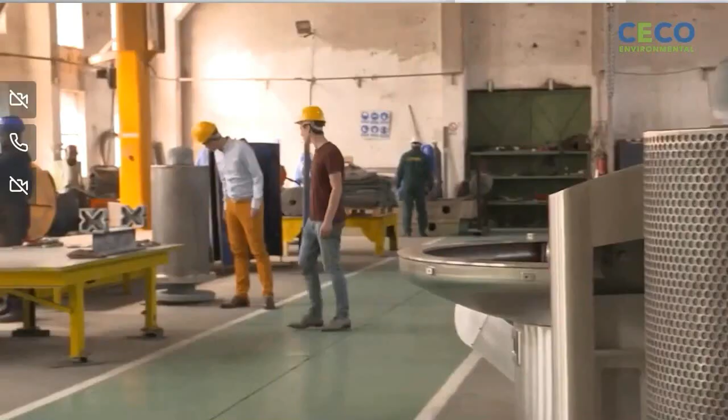CECO-Environmental is energized by our mission to protect people, the environment, and industrial equipment. Our ongoing commitment to this mission is no small feat, and we take that challenge seriously. It's at the core of how we think, feel, and act.

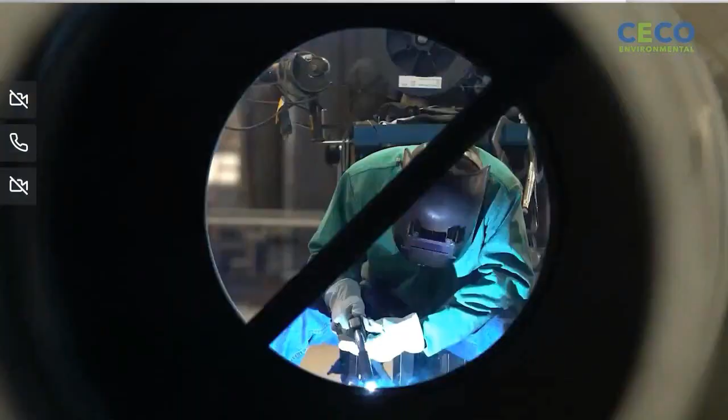For more than 50 years, CECO has served customers in more than 40 countries through our network of trusted and well-known brands. Our expertly engineered technologies help companies across diverse industries grow their business with safe, clean, and efficient solutions that help protect our shared environment.

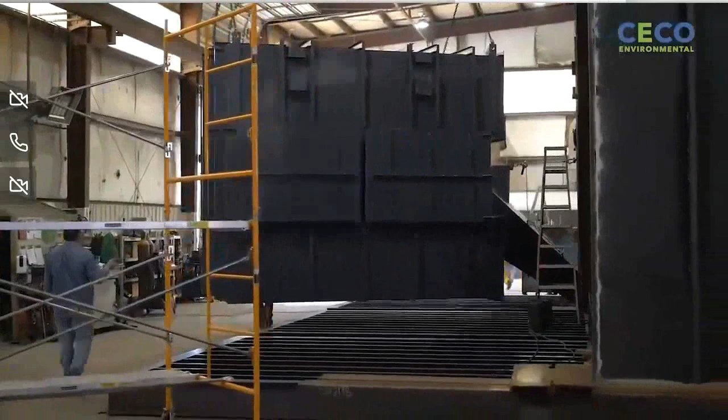CECO can improve air and water quality, optimize the energy value chain, and provide custom-engineered systems for a wide range of applications by leveraging our highly refined technologies and years of expertise. CECO is proud to serve our customers in a broad landscape of industrial air, industrial water, and energy transition markets worldwide across our key business segments.

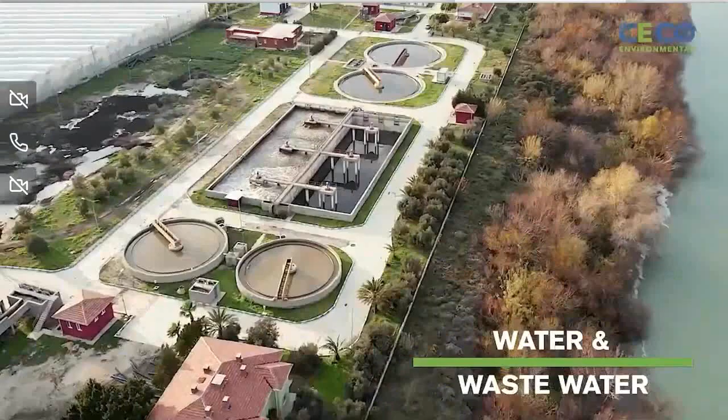Engineered systems, power generation, refinery, water and wastewater, and midstream oil and gas markets require efficient and effective emissions management, product recovery, and water and gas separation solutions. CECO meets these needs with our highly engineered environmental and equipment protection systems.

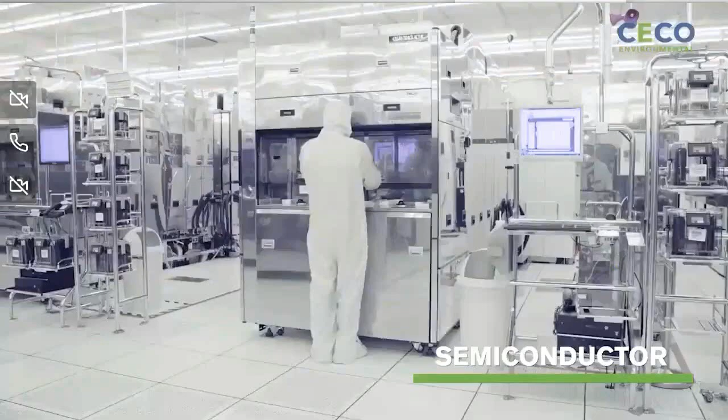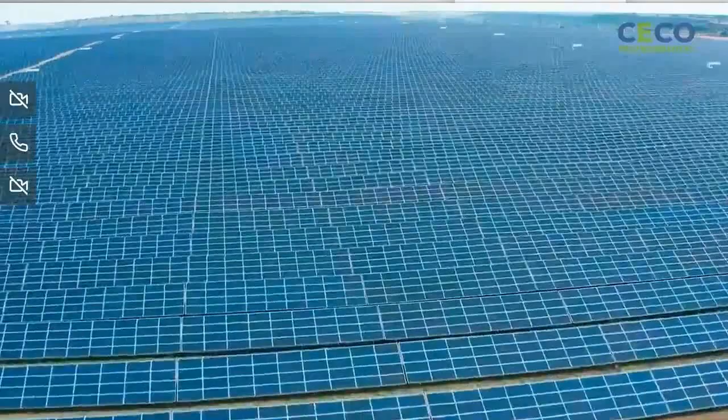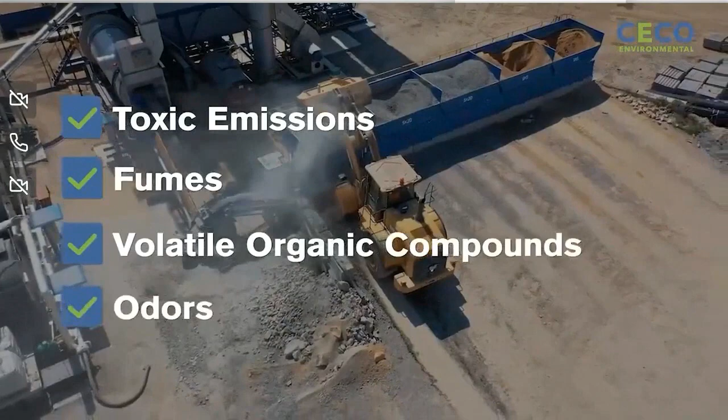Industrial process solutions. From semiconductor to pharmaceutical production, food and beverage to electric vehicle manufacturing, CECO helps protect the air we breathe, maintain clean and safe workplaces, lower energy consumption, and minimize waste for customers to ensure they meet regulatory compliance standards for toxic emissions, fumes, volatile organic compounds, and odors. CECO provides industry-leading products and services to ensure our customers meet or exceed environmental regulations or other goals.

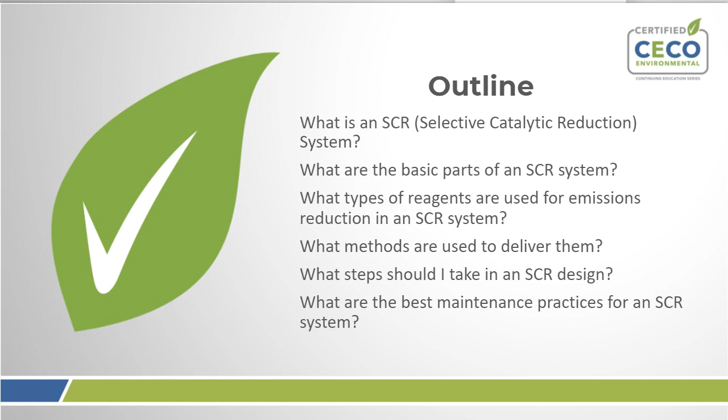We're going to start with a poll question, and we have a few of them in this presentation, and you'll be able to actually input your answers on the next slide. So starting off, how much experience do you have with SCR emission systems? Options are: I'm an expert, I have some experience, I have a little experience, I really don't know what an SCR system is. So here you go. Please enter your answers here, and we will take a look at the results in a second.

Give it another second here. Okay, let's see what we've got.

Okay, so we have here a good portion have a little bit of experience. Some are a little bit more, but it doesn't look like we have a lot of experts, so I think that's great. I think the presentation that we have pulled together for you today that Jeff is going to work on is going to give you a lot of info and give you that great baseline.

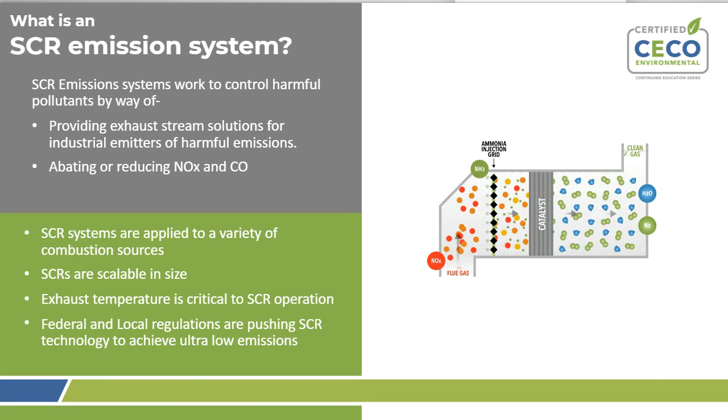So why do we need SCR technology? As mentioned, it's to help reduce air pollution. I think most of us have probably heard of the terms ozone and smog. Some people think of the ozone layer, something we want to protect. A lot of consumer products have CFCs in them, and those have been reduced over the years to help protect the ozone layer because we need that ozone layer up high. Ozone lower, closer to the ground, can be problematic.

Different types of emitters, such as power plants or cars and trucks or factories, emit NOx pollution, and NOx combined with VOCs and heat and sunlight creates ozone down low. And what we see as ozone forms down lower towards us is the production of smog, something you can see by looking outside. If we're reducing NOx well, you'll see less smog in the nearby areas. That's really the main driver for why we want to apply SCR technologies on combustion sources.

So what is NOx? What is the thing that we're saying is helping to create smog, which we don't want? They're nitrogen oxide gases. It's a pollutant that is primarily formed through the combustion process, meaning at high temperature. In some cases, there's actual nitrogen in the fuel. For instance, coal and biomass and some oils will actually have nitrogen in the fuel that will oxidize into NOx. But primarily, in a combustion source, the majority of NOx is created from what is called thermal NOx.

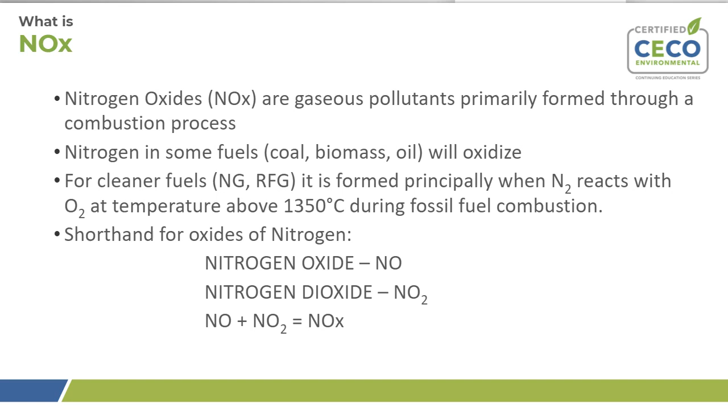As said, it's a driver to reduce air pollution, and in the 70s and 90s, the Clean Air Act by the EPA set out to help in the reduction of this air pollution. The National Ambient Air Quality Standards, NAAQS, called out six different criteria harmful air pollutants: particulate matter, ozone, which we just discussed, SOx, which has to do with sulfur, and then NOx, CO, and lead.

Both state and federal regulations help drive the standards that we're trying to meet today. In some cases, the state regulations can be more strict than the overall federal regulations.

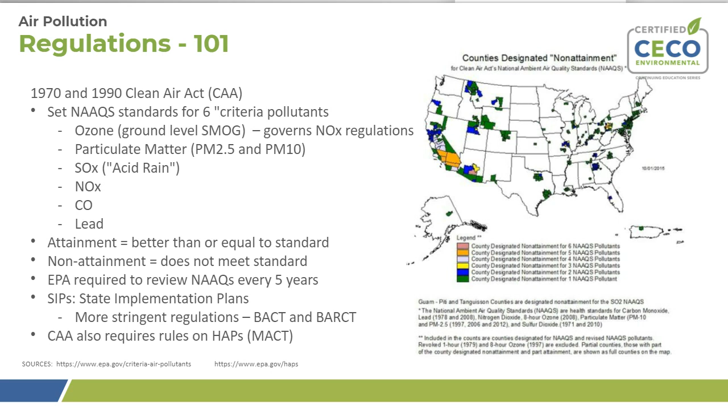To help further define SCR, it's Selective Catalytic Reduction. It uses a catalyst to help reduce the emissions. It's an active emissions control system, which means we are actively injecting and controlling the constituents of exhaust to help reduce the NOx emissions. We do that with a liquid reagent, which is typically ammonia, through a specialized catalyst.

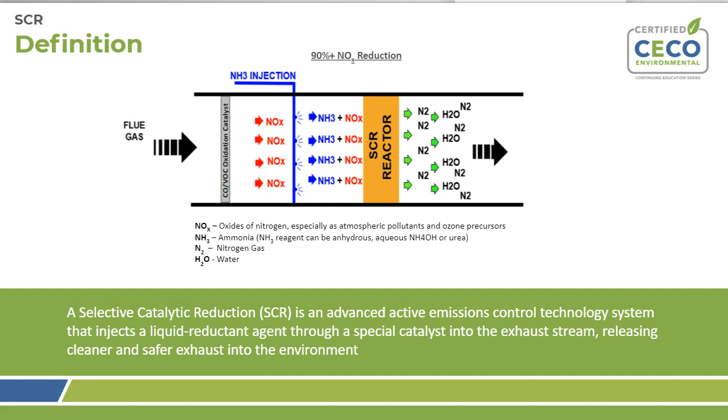What are some applications for SCR? So it's a pretty versatile technology for a lot of different combustion sources, and it can be applied to a wide range of fuels. As we know, different combustion sources can run on different fuels. So a boiler or a gas turbine or whatever it might be might have a different fuel. So natural gas is a very common fuel, RFG or reformulated gasoline, obviously, different fuel oils, coal, biomass, hydrogen, and even some other what are referred to as opportunity fuels or waste fuels could be combusted and create different varying levels of NOx, many of which can be solved by installing an SCR system.

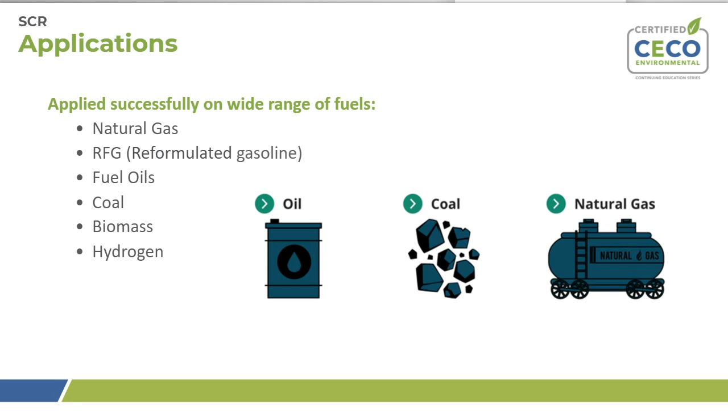So it's a versatile technology in terms of what it can treat from different sources. It's also versatile on the size and type of combustion source. So combustion is a very broad term and it can be done in a variety of ways. For instance, you could have a burner installed on a boiler, a package boiler, a larger boiler, that obviously combusts a fuel and creates exhaust emissions that has NOx.

So a lot of different types of equipment produce NOx because of their combustion process: gas turbines, boilers, engines of a variety of sizes, and others such as heaters and reformers and kilns and incinerators. So it's, again, a variety of fuels and a variety of combustion sources can all be fed to specialized SCR systems to help reduce the air pollution coming from those sources.

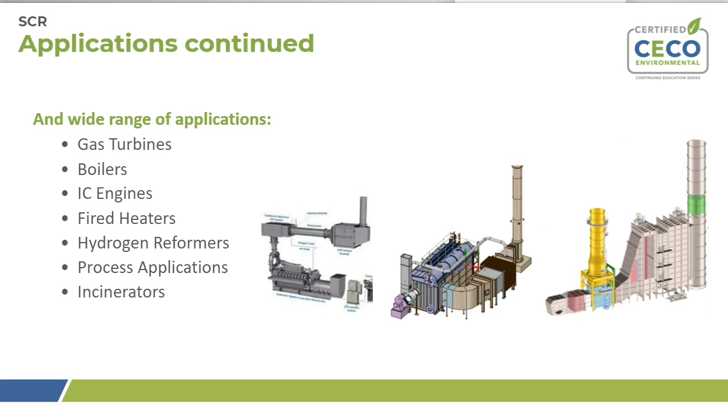So we've been calling it an SCR system, and it truly is a system and isn't a single piece of equipment that is controlling the emissions from the combustion source. It's a combination of equipment or subsystems working together in conjunction to achieve the overall goal. Generally speaking, there's some sort of storage for the liquid reagent we mentioned, typically ammonia, that needs to be stored on site to be used in the process. That then needs to be forwarded to the process and controlled in a specific way to make sure you're not using too much or too little of that reagent.

And then it needs to be carefully injected, depending on the size of the exhaust and the quantity of exhaust and ammonia being used. There's different methods for how you would inject it and introduce it into the exhaust stream. And again, it needs to combine with that dirty exhaust upstream of the catalyst, mix out in the catalyst, and reduce the emissions in that method. So there's several subsystems that go into making a complete SCR system function properly and efficiently.

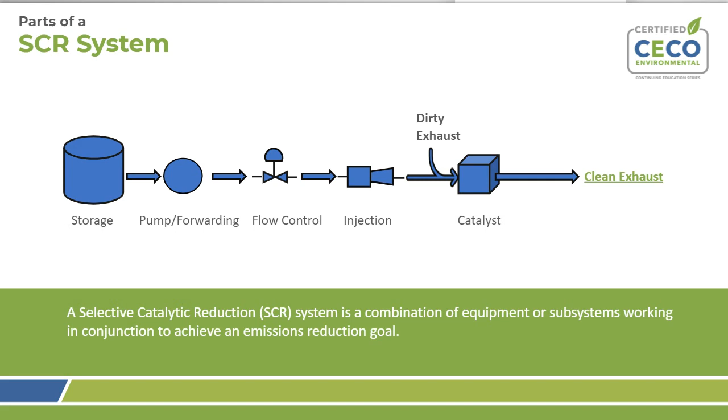So as mentioned, there's storage. So typically there's an ammonia storage tank involved with the system, and that's kind of the first step in the process. We need to make sure we have the reagent on site, on hand, to be able to effectively reduce the emissions. So typically, these tanks are designed and fabricated to certain codes of the American Society of Mechanical Engineers. There are standards that need to be met, and a lot of those standards are designed around the safety of storing this liquid.

Typically, the size of a tank, and of course it depends on the size of the system and how much NOx needs to be reduced, but 500 to 10,000 gallons of capacity is within the typical range, and you can certainly use smaller tanks or much larger tanks if needed, depending on how much storage capacity is required. Typically, they're large steel tanks. They could be steel, they could be stainless steel. In very specific applications, you could use alternate plastics or whatever it might be.

Ammonia is typically stored under pressure, so the tank needs to have specific pressure ratings, and you need to monitor the condition of that tank. So there's instrumentation involved with the storage. We want to monitor, obviously, the level of the tank to make sure there's enough liquid in there for the process. The temperature, the pressure are important. The ammonia can operate throughout a wide range of temperature, but you need to monitor it to make sure it's not outside of that range.

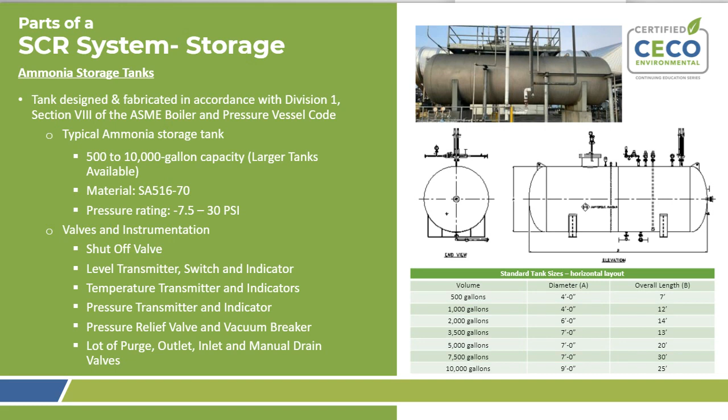So from that storage tank, we go to typically a pump skid, and that pump skid is used to send this liquid reagent out to the process. It also circulates that reagent to the tank to maintain certain pressures and turn over the tank if needed.

Typically, we like to avoid single points of failure. So oftentimes on a system, there will be redundancy, and that 2x100 represents each pump able to handle the entire flow of the system if needed. If there was a problem with one of those pumps, the other one could be used in its place. Oftentimes, these are made of stainless steel because of the location of the installation, the harsh environment it might be located in, and the longevity of the equipment.

And again, a lot of instrumentation involved with the pump skid, as with all the other parts of the system. We want to monitor certain parameters to make sure the system is operating as we want it. So the pressure, we don't want to overpressurize anything. So there's safety switches, safety valves. We want to monitor the flow and the pressure of the liquid out to the process.

We want to make sure that liquid is clean to the process. We don't want to have any tramp material coming from the tank, or that might be some impurities in the reagent. So we filter the ammonia as well in this stage to make sure we're not plugging anything up downstream. And we'll typically monitor the pressure across that filter to make sure we know when that needs to be cleaned.

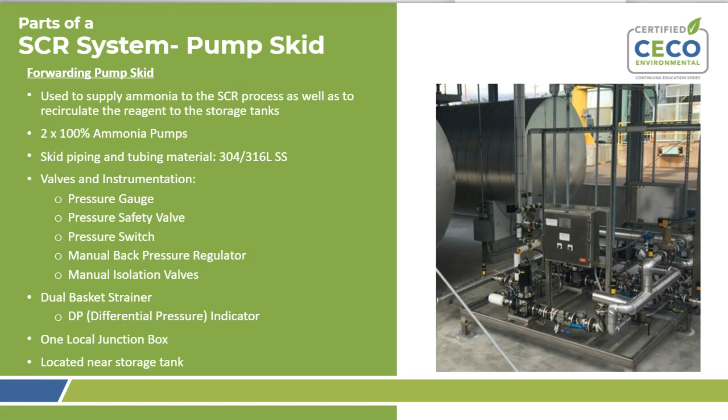There's obviously going to be some junction boxes and controls involved with the system. So as you can see from the picture, a junction box, and oftentimes this is located next to the storage tank. There are certainly specialty situations where this might be remote, but ideally this tank and pump system are relatively close to each other.

So we also need to control the amount or the flow of ammonia being introduced to the process. Obviously, the size of the system, how much emissions are being reduced, how much exhaust flow there is, it's going to change the amount of ammonia required going through the system. Every SCR system has its own set flow requirement. So we need to carefully control that flow and how we introduce it into the process.

Oftentimes that's done with flow control valves for the reagent, and we feed that into what is often referred to as an AFCU, or ammonia flow control unit. And that ammonia flow control unit is used to take that liquid reagent and vaporize it into an ammonia gas with the use of hot air or hot gases.

A very typical way of doing that is to use some fans. Again, just like the pumps, we would often use redundant fans. An electric heater can be used to create the heat needed to vaporize that liquid into an ammonia gas, and we can then control the flow of that ammonia gas to the process through the AFCU skid.

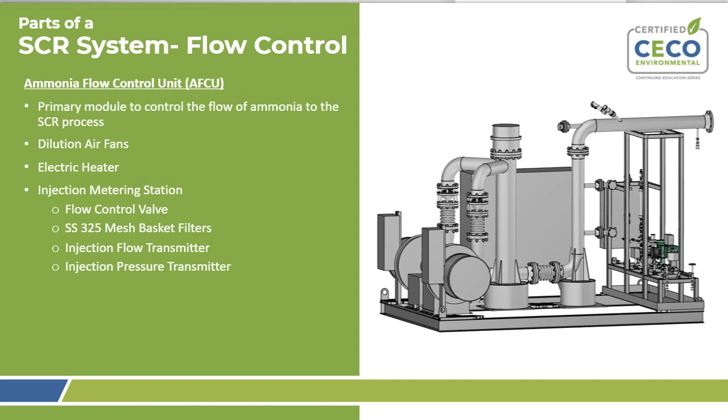So as we mentioned, an SCR system can be applied to a lot of different types of units with different types of fuels and different types of exhaust gases. Because of that, there's not a one-size-fits-all design solution for an ammonia flow control unit. So there's different designs that could be used in the process to control the flow of ammonia into the system.

So some of these systems use what's called hot gas recirculation, where you're actually pulling exhaust gas out of the combustion source and using that as the heat to vaporize your ammonia. Oftentimes on a smaller unit maybe, we use an electric system, which again, ambient fans, taking in fresh air, pushing it through a heater and using that as the heat source to vaporize.

Or you could actually combine those two types of systems. So you could actually pull in hot gas and heat that hot gas with an electric heater if you wanted to start up sooner. So some regulations are pushing different combustion sources to reduce NOx as quickly as possible. So a combined unit might be used on a larger unit or a unit that needs to start up more quickly and not wait for the process to become hot, but promote that heat more quickly so the SCR system can start up more quickly.

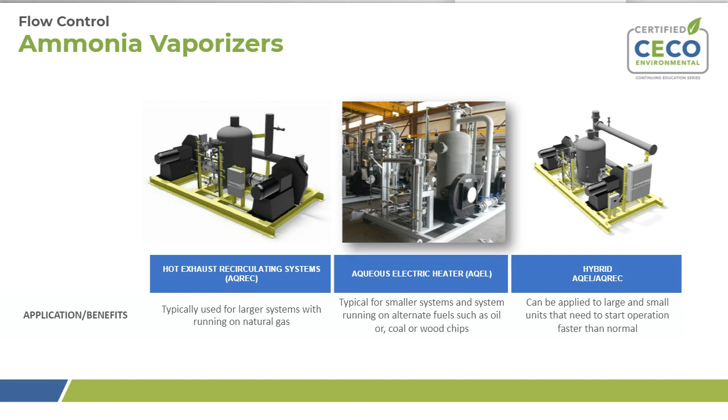So another part of the SCR system is the injection. So how is that ammonia then injected into the exhaust stream? So at this point, we've been on kind of the cold side. Most of the equipment is outside next to the combustion source, but we need to introduce that ammonia into the exhaust flow before it goes to the catalyst. So we need to mix that ammonia out with the exhaust. So we need to, what we call, inject that ammonia.

So there's multiple ways to do this. Two very common ways here are with an ammonia injection grid or with actually a liquid nozzle. And they are obviously designed to introduce the ammonia into the exhaust gas. And AIGs are used to do that in the vapor form, whereas an air-assisted injection nozzle would be used to inject it as a liquid upstream the catalyst and use the heat of the exhaust. We'll go into more detail on both of those in subsequent slides.

The size, the quantity, and the injection rate are all factors on how you design and size the type of injection equipment used in the specific application. The duct size makes a big difference. How hot is the temperature of the exhaust, and what are the requirements of the system? How much of the NOx in the combustion process does it need to reduce?

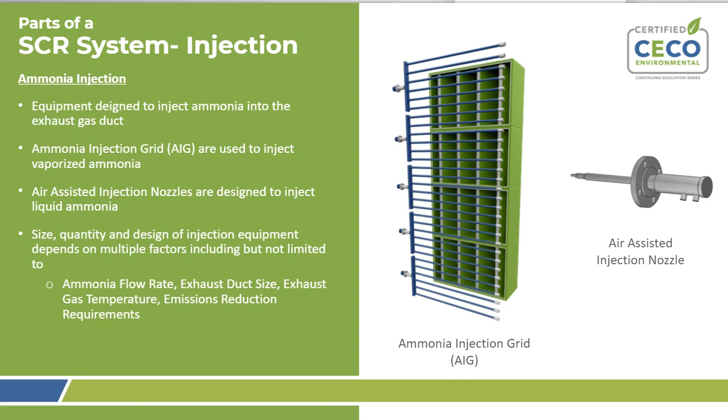So as mentioned, there's really two main types of injection systems. Again, the AIG, the ammonia injection grid, is used when you're vaporizing liquid ammonia into ammonia gas and then introducing it into the exhaust. And the air-assisted nozzle is when you're injecting the ammonia in as a liquid directly into the combustion source or the exhaust gas and having it vaporize with that heat.

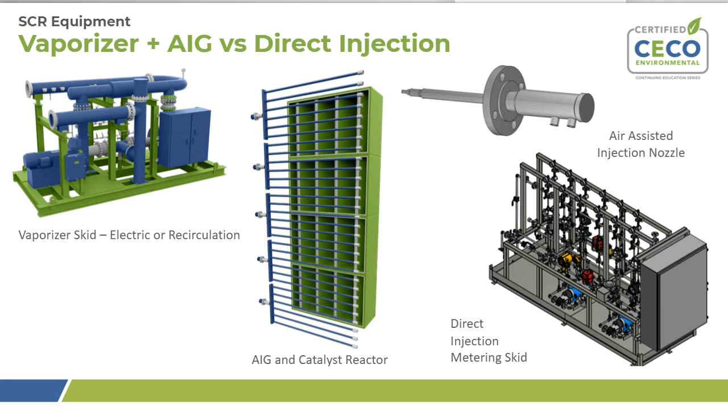Obviously, a critical part of the system as a whole is the catalyst itself. All of the exhaust gas needs to pass through this with the NOx and ammonia for the system to be effective and actually reduce the air pollution. So some of you might be familiar with the catalytic converter that's on your car or your truck. If you've ever seen that, it's a porous substrate that all the exhaust gas passes through, and it reduces, in that case, CO emissions. This catalyst at a high level is relatively similar to that. So all of the exhaust gas must go through the catalyst to reduce the emissions.

So it's typically precious metals that are impregnated onto a porous substrate. So if you were to be looking through a catalyst, you could actually see through it a little bit, but there would be very small holes that you would see. These precious metals are formulated and adhered to the catalyst based on the specifics of the system. So the exhaust flow, the exhaust temperature, the emissions requirements, and how much NOx needs to be reduced are all factors that the catalyst suppliers use to formulate and engineer their catalyst to perform on that specific application.

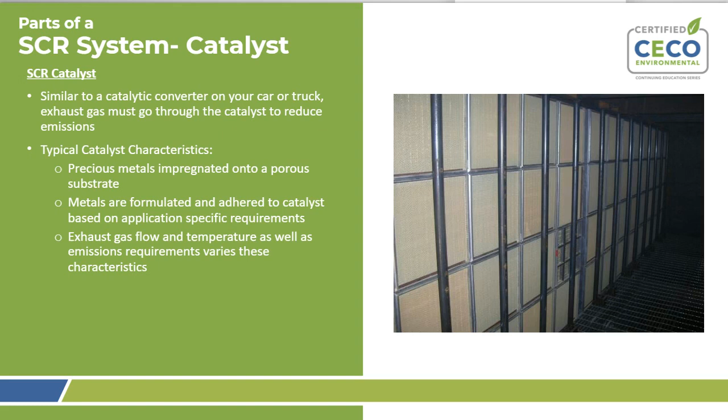So as you can see there, a picture of the catalyst of a relatively large system. It's typically installed in the field when the system is being built. The amount of catalyst depends on just how much exhaust is going through it. So the more exhaust going through the catalyst, the more catalyst volume we need. And the higher the NOx reduction requirements of the system, the more catalyst volume we need. So there's quite a bit that goes into the sizing of how much catalyst you need to treat all of the exhaust.

Catalysts are typically made in modules at a factory, and they're shipped to the site, and then in something like that picture that you're seeing there are installed by qualified professionals. It oftentimes requires scaffolding and hoists and things of that nature to make sure the catalyst is installed properly. And in the maintenance portion of these slides, we'll see why that is so important.

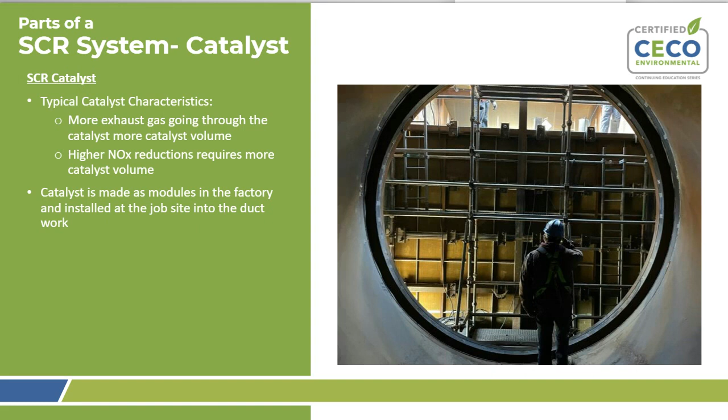There's a lot of unique designs in today's industry that the catalyst suppliers are able to make, things to reduce pressure drop or operate at higher temperatures or lower temperatures than they've been able to in the past, or treat different types of exhaust constituents. So a lot of specialty products out there. And it's very flexible. It's custom designed for the application.

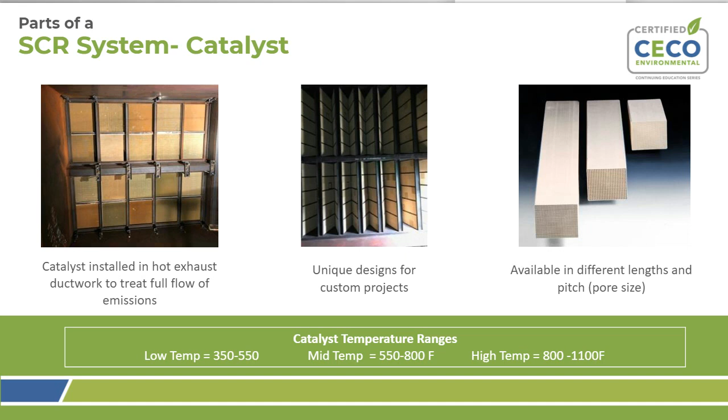And there's also specialty catalysts that can reduce more than just NOx. It could reduce CO or even VOCs in one layer of NOx. And there are other standalone catalysts that can do different exhaust constituents as well that are not necessarily related to SCR, but might be used in conjunction with them.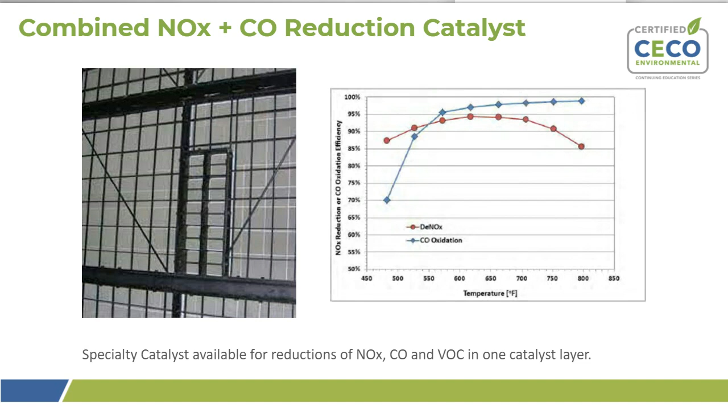So in addition to the prime sets of subsystems that go into the SCR system, the storage and the forwarding and handling and the AFCU skids and the injection, there's going to be other systems or ancillary pieces of equipment that need to go along with this to make sure it's fitting up to the combustion source that it's being applied to. So there's going to be some extra ductwork involved with having an SCR system. You may need fans to control the flow of gas, to overcome pressure, to cool the exhaust to a certain temperature that might be needed.

There's going to be some sort of support structure needed to hold up the system. These can be very large systems in some cases, in which case you also might need to be able to access the equipment. So additional platforms and ladders and other ancillary equipment might be needed.

And then it's possible that the emissions might need to be monitored at all times. So if a state regulation is forcing an SCR system to be used on a certain combustion source, they may also require that the NOx emissions be reported on a continuous basis. And there are analyzers that can be installed to accomplish that, to make sure the SCR system is working properly.

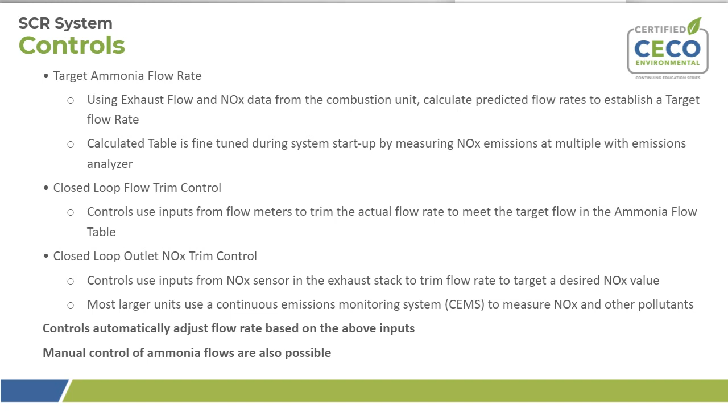Most of the time, these systems can operate in automatic, so they're set up with the end user at the particular plant or site they're at, and they can run in automatic when the combustion unit starts up. So does the SCR, or sometimes they're more of a manual process. But there's a lot of controls that go into making sure these systems work properly. These are just examples of sketches or graphics of what those controls might look like and how they apply to a system that operates at different conditions.

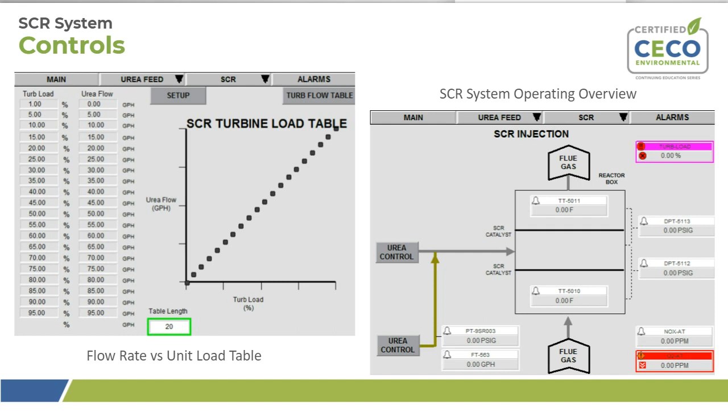So if you think of an engine and you push down on the gas pedal, your engine's then working harder and there's actually more exhaust coming out of it. So same with a much larger combustion source. All these different sources can operate at different, what we call load ranges or operating conditions. So the different operating conditions would require different flow rates of ammonia, and that all needs to be monitored and controlled. Again, because there's multiple subsystems involved with a full SCR system, monitoring the tank level or the pressure of the ammonia or the heat of the exhaust, all of these things are important to make sure the system is operating the way it's designed to and reducing the harmful pollutants.

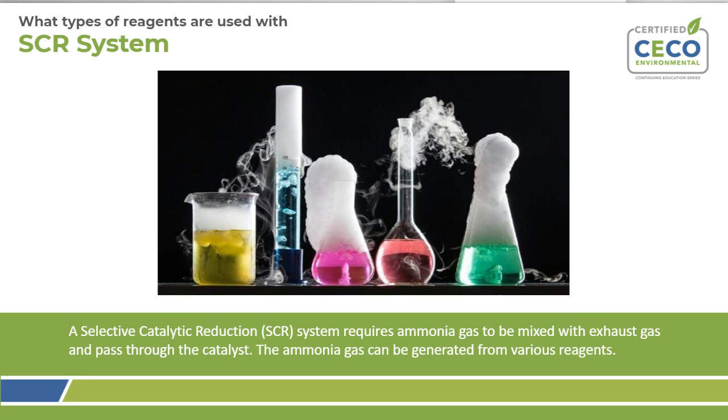So what types of reagents can be used with an SCR system? Ultimately what we need is ammonia gas being mixed out in front of the catalyst. The catalyst is using the ammonia as a gas, but there's multiple ways to achieve introducing the reagent into the system to produce that ammonia gas. Namely, there's three main ways to do that. Anhydrous ammonia, which is already in gaseous form, can be stored at the site and controlled and sent over into the process. This is a method that's been used for many years, but it does have some safety concerns.

So anhydrous ammonia or ammonia gas is very dangerous to the personnel working at the site. So there's a lot of factors that need to be considered in how it's stored, how it's transferred and even how it's delivered to the site. So that can be a little bit arduous for some locations and a little bit too dangerous in certain applications. So there's been, over the years, ways to figure out how to make it a safer process.

One of those processes is to use aqueous ammonia, which is in a liquid state. So it's essentially diluted ammonia, and you can store it under relatively low pressure in a similar type of tank. The most common way the ammonia is diluted is down to 19%. 29% is also used, but the more common way is a 19% ammonia solution. It still has some safety concerns, but it's not quite as dangerous because it is a diluted reagent at that point.

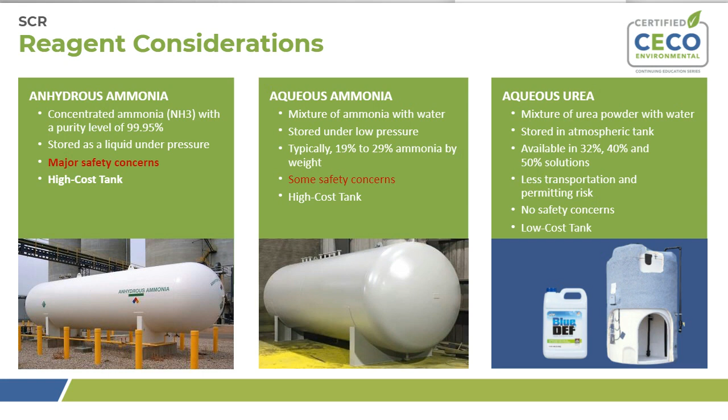The safest version is to use urea. Urea is also known as DEF, or diesel exhaust fluid. That's widely used in automotive applications and has been applied to larger systems as well. And there's different concentrations of urea as well. The main selling point of urea, or the main driver of using urea, is because it can be stored without any safety concerns. It is non-hazardous and is not dangerous to personnel, but it does need to be converted at high temperature to ammonia. So there are some challenges associated with that.

So again, anhydrous ammonia, if it's already in gas form, it's a very straightforward way of controlling the SCR process. Essentially, what you do is you use the AFCU, the piece of equipment we've already discussed, and you use blowers to feed that into the process. Because it's already in gaseous form, there's usually no need to then vaporize it. So it's a very straightforward way of feeding the ammonia to the SCR system. Low power consumption, in some cases just overall less equipment, and very straightforward.

If the decision was to use an aqueous ammonia reagent to be a little bit safer, in order to introduce it into the catalyst, we need to then vaporize the water out of that reagent. So a little bit of an extra step there to use aqueous ammonia instead of anhydrous, because we need to vaporize the water out of the reagent and then introduce it into the system. So could be a little bit more cost on the AFCU side, and it could be employed with either AIG or direct injection.

And then a little bit safer, but a little bit more complicated in some ways, is urea. So again, this would be stored as a liquid. So the water still needs to be vaporized out of it, but it also needs to be what we refer to as decomposed into ammonia. So it needs to be heated to a higher temperature, more than just vaporizing the water out of it. You actually need to convert the urea at high temperature into ammonia for it to be used in the process. So at this point, you have a higher cost AFCU, larger pieces of equipment in order to vaporize and decompose the urea into ammonia. So those are the three main reagents there.

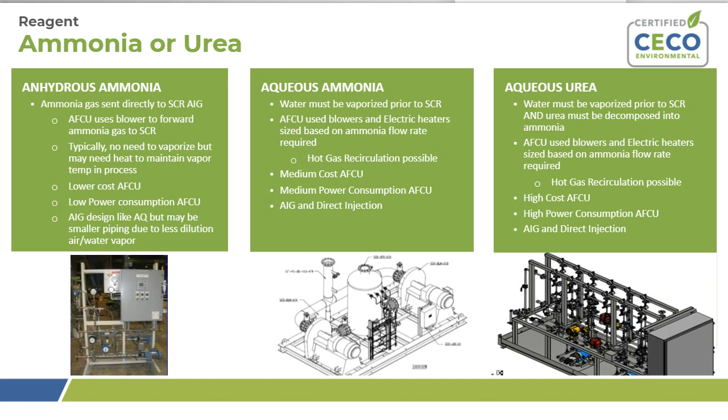That same system, if it was an aqueous ammonia system, same amount of raw ammonia needed, but because it's in liquid form, there's actually more pounds of it. So you have 33 pounds of it, or 4.3 gallons per hour being injected into the system. So the AFCU now needs a heater on it. So you need 50 kilowatts of electric heat that you wouldn't have otherwise needed with an anhydrous system, but you're using a safer alternative.

And again, one step further towards the safety, if we were using a 32% urea system, same amount of ammonia needed to go through the catalyst again, but that AFCU skid needs to be larger to not only vaporize the water, but decompose the urea into ammonia. So now you're stepping up the AFCU size to a 10 horsepower blower with 200 kilowatts of electric heat to vaporize and decompose that urea into ammonia to be fed into the system. So just an example of how each one looks on a similar combustion unit and what the trade-off for complexity versus safety might look like.

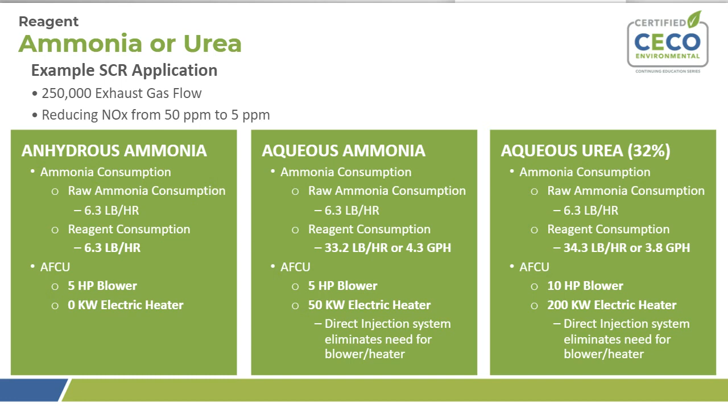We spoke a little bit about ammonia storage and handling in the previous slides, and there are some differences in how urea is handled. So just going through that, oftentimes urea can be stored in a plastic or stainless tank because it is corrosive to carbon steel. So the storage tank for urea is going to be different than what you would see for ammonia. Using stainless steel throughout is required because of the corrosion.

One of the challenges with urea is it will freeze or crystallize at low temperatures, but those temperatures are much higher than what it would be for ammonia. So we need to keep an eye on the temperature of the tank and the temperature of the piping to make sure there is no freezing of the urea in the process, which would plug up the piping and cause major problems with the system.

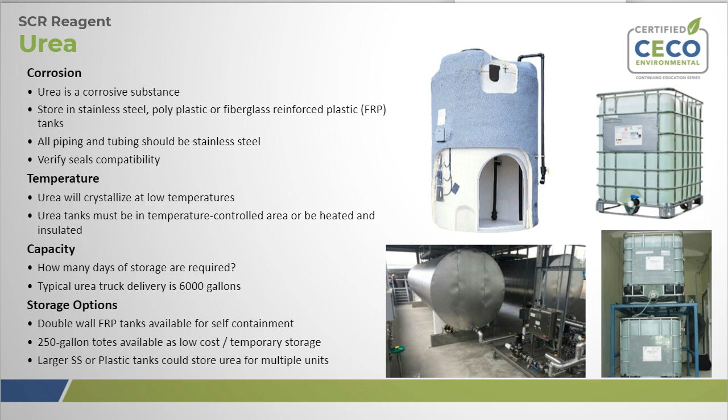We've touched on the two main ways you can inject the ammonia into the exhaust stream, namely the AIG and AFCU that we've been discussing, and what we refer to as direct injection, where you're actually injecting the liquid directly into the exhaust stream. So those are really the two main methods. The vaporizer and AIG is known as a little bit more of a traditional solution, and the direct injection is a little bit more of a so-called advanced solution.

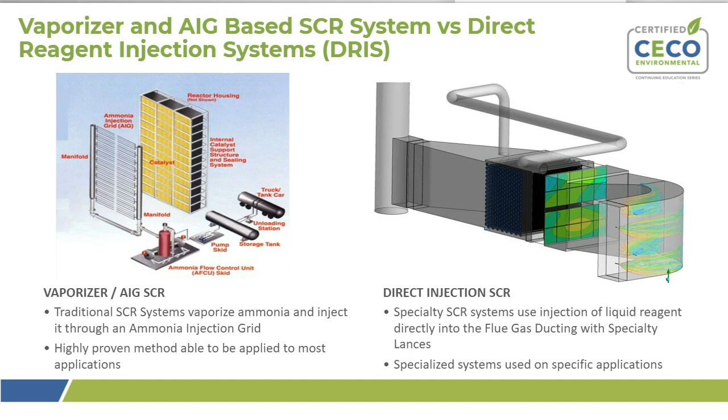So again, on the AFCU side and AIG side, we're taking the reagent from a tank, pumping it, putting it through an AFCU to control the flow, and the ammonia injection grid is an array of piping with multiple holes in it to control and distribute the flow of ammonia through the system. It's a very efficient way of distributing the ammonia in front of the catalyst, and you can mix it all out in a very short distance, which is the advantage of it.

This type of system is typically used on larger units with large catalyst cross sections because it's able to distribute that ammonia so efficiently all the way across the gas path. This type of system does require that the ammonia be vaporized upstream of the process. So ammonia gas must be going through the AIG, not liquid ammonia.

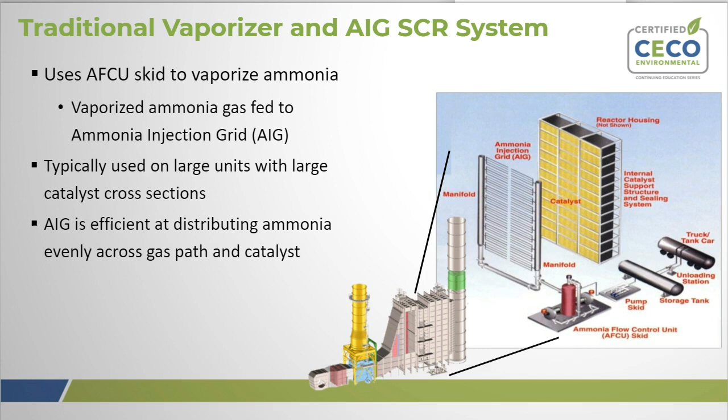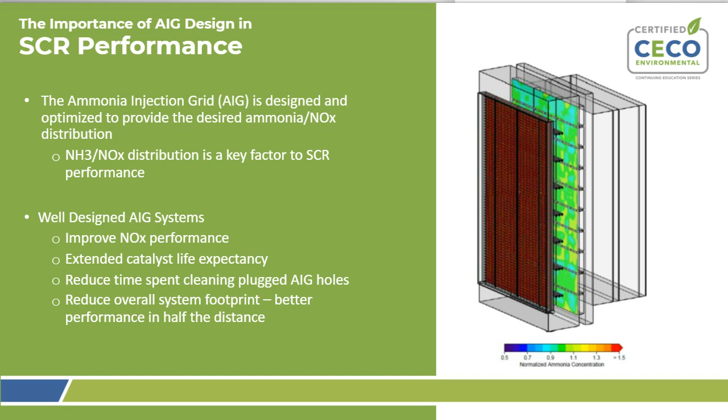Again, more information on the AIG: the design of it, the piping, the exit hole size, the locations of those holes are all important and need to be detailed out in order to properly design the system. One thing that needs to be taken care of is to make sure that the AIG does not plug up.

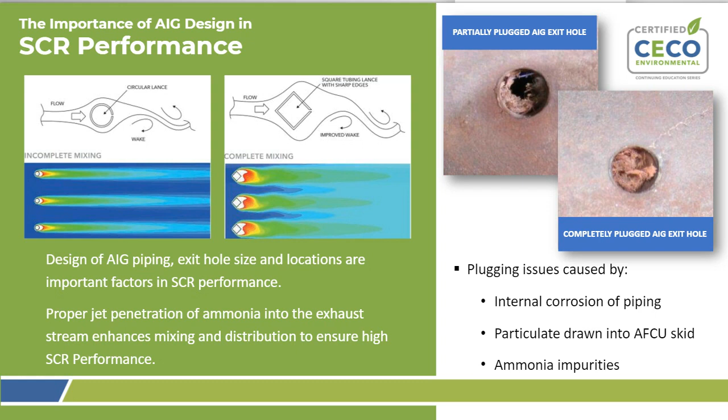A direct injection system can be applied to some systems, but not all. So some of the feasibility considerations that go into that: is there a duct burner? What is the size of the duct that needs to be injected in? What's the residence time and how much mixing is needed? All of those things need to be considered when analyzing if direct injection can be used or if a traditional system should be used instead.

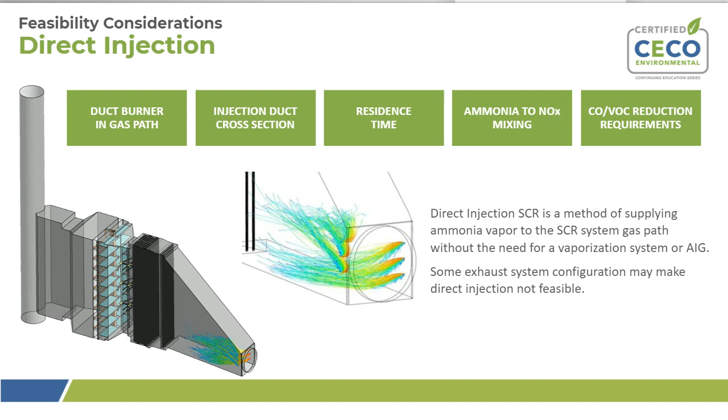If it can be used, there are some operational benefits to injecting it directly as a liquid. It requires less equipment because the blowers and heaters are not required to vaporize the ammonia upstream. So less equipment means less cost and less operational cost. It also would result in less maintenance because there's less equipment, there's less things to maintain, and fewer moving parts means just a bit of an easier operation for the system as a whole.

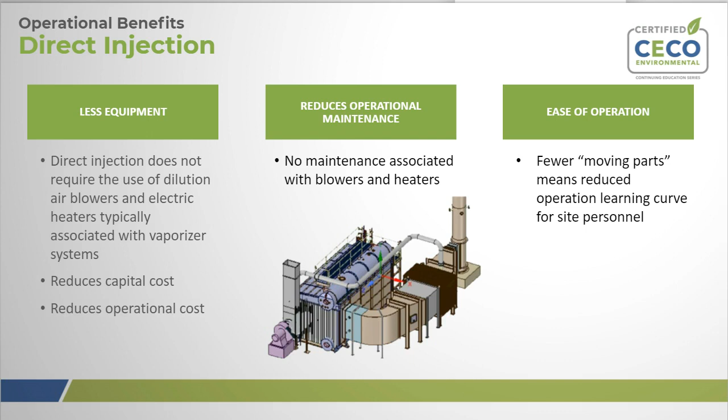So similar equipment that we've talked about. Obviously, you still need storage. You still need to control the flow and still need to inject, but the details of those systems are just slightly different based on not needing to actually vaporize the ammonia first. It still all needs to travel through a catalyst and needs to be evenly distributed across the face of that catalyst. But the details of those systems look slightly different.

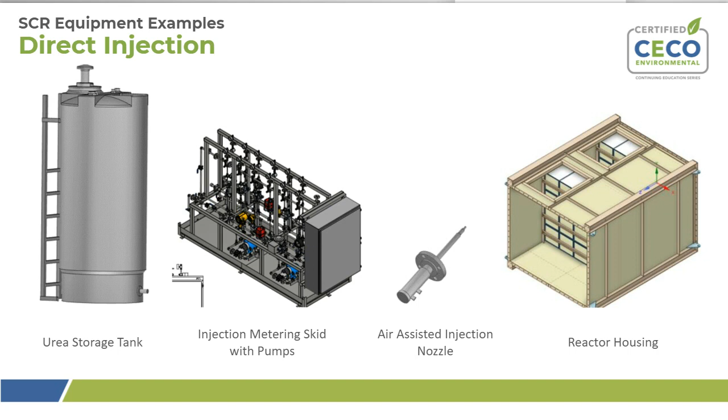Pictures of the same equipment to show some scale of what it might look like on a package boiler: a 1,000-gallon tank next to a control system that has pumps in a control panel and a reactor box that houses the catalyst.

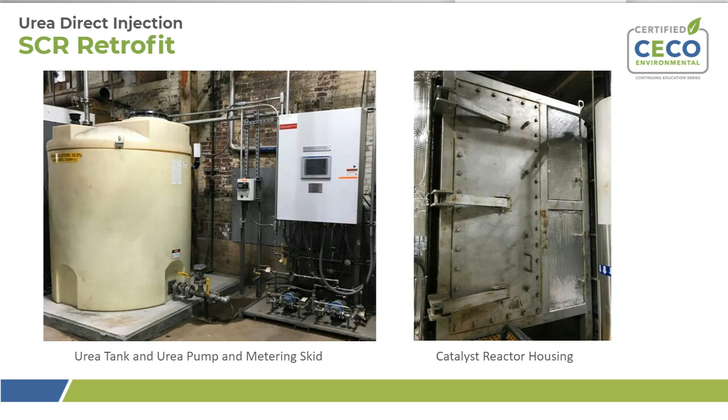Okay, we're getting to the end of the presentation here. Give Jeff a quick break. So we're going to cruise through this one pretty quickly, though.

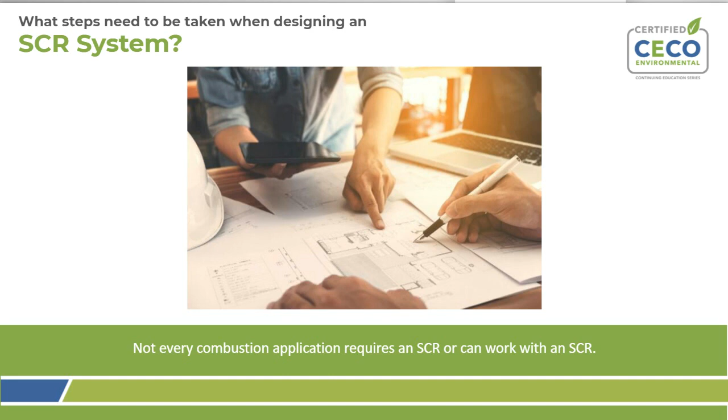All right, what steps do we need to take when we're looking to design an SCR system? So some of the overall considerations: just how low does the NOx need to go for the SCR? Have other NOx reduction methods been applied? So could the NOx be reduced at the combustion source instead of with this after-treatment type of system? Again, we've talked about the types of fuels and units that it could be applied to and how versatile it is, but there may be some restrictions based on the specifics of either that fuel or that specific combustion unit.

Oftentimes the space is a major concern for installing an SCR. These do take up space, as we've seen from some of the photos and graphics. So does the site have the space to control this? And then does the plant have the utilities needed? And can the existing equipment work with an SCR system, or will some of that need to be replaced? And then obviously, will the system meet the permit compliance that was written to regulate the combustion source so that the system can meet the needs of the air permit and the facility that it's working in.

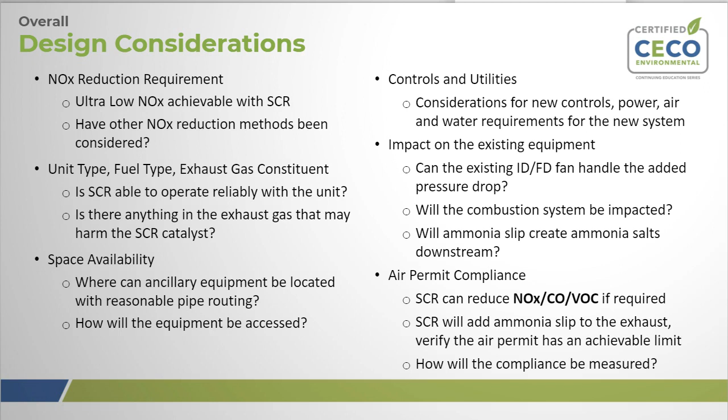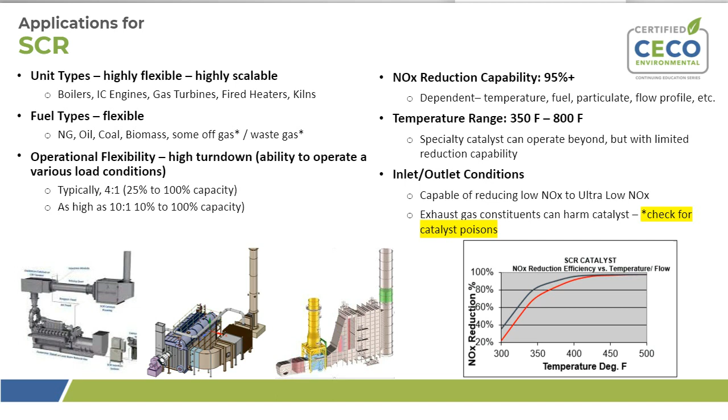We've already reviewed that it's a flexible type of system with the units and fuels that it works on. It's a highly effective system in terms of how much NOx it can reduce, 95% or more in some cases. Again, the system, the catalyst specifically, needs to be located in an area of the exhaust that is at the proper temperature, 350 to 800 degrees typically. And what are the inlet and outlet conditions of the system, and how do we design around that?

There are some poisons in specific exhausts that can limit the use of catalyst in a system and therefore limit using SCR as a whole. Some of those are listed there. If there's too much particulate, or dust or ash, that could coat the catalyst and cause problems, just like it would plug up a filter. It could plug up the catalyst, causing performance issues. Ammonia and sulfur combinations can be problematic because they can actually form some solids and mask the catalyst. Specific metals can either mask or actually poison the catalyst and make it ineffective. And there's some other additional poisons listed there.

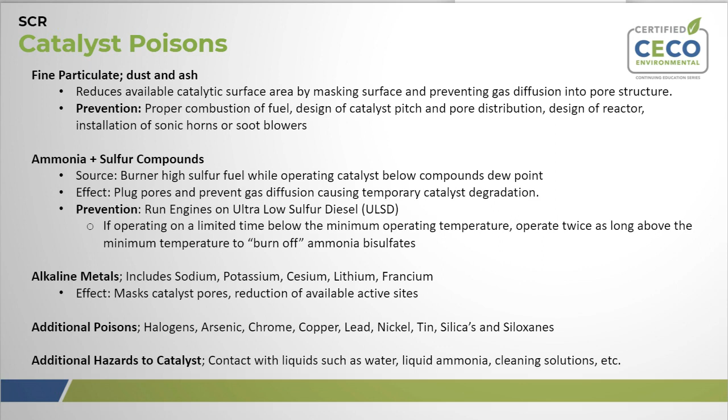And another thing we want to avoid is actually spraying water or an actual liquid onto the catalyst, which is why we need to design the system carefully to make sure we're not spraying any liquid urea or ammonia onto the catalyst when we're doing direct injection.

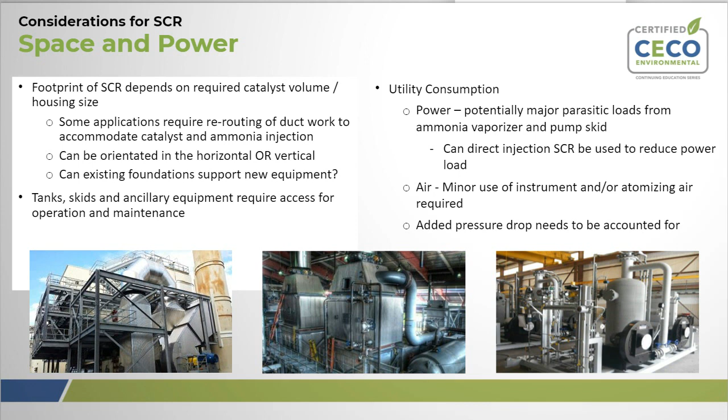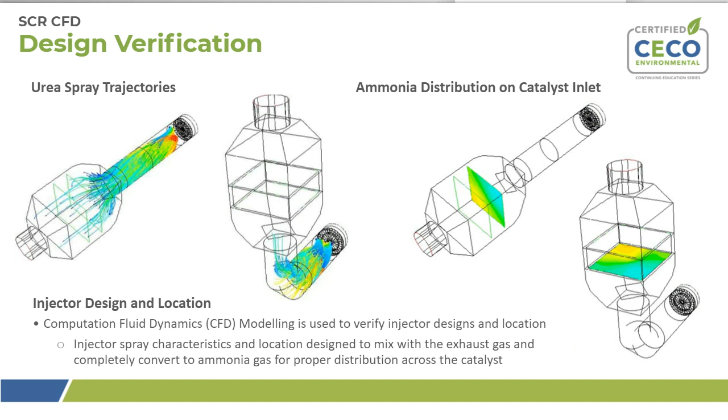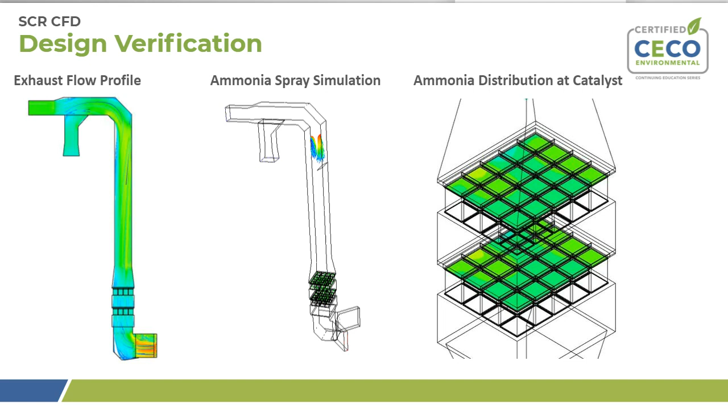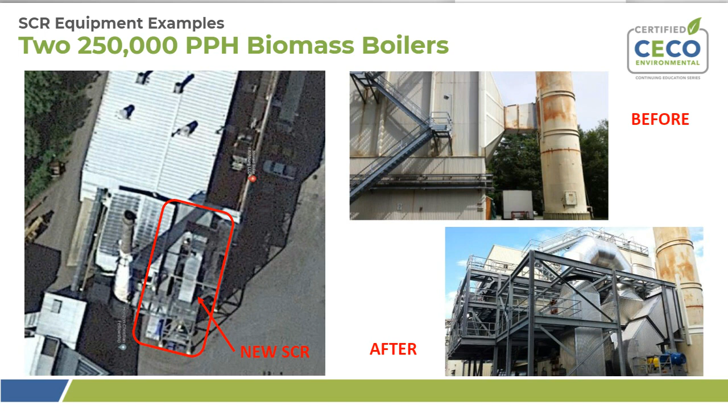An example photo here of how these systems may be able to be retrofit on the specific units. So these were two biomass boilers of a similar size, and you can see in the top right and bottom right the before and after pictures of just how large some of these systems can be as compared to the equipment it sits next to. So obviously pre-design planning needs to be done to make sure that you're going to be able to fit the system with the rest of the facility.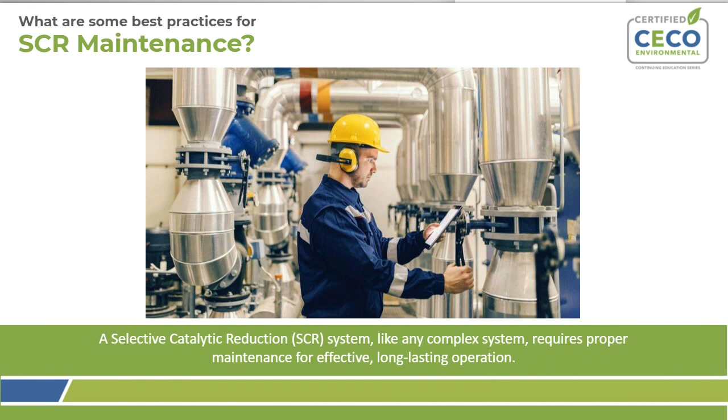Some best practices for maintenance to make sure the system lasts the design life. The AFCU controls the flow of ammonia, so that needs to be inspected for any type of fouling or plugging. Obviously, the catalyst is an important part of it, and that needs to be maintained and cleaned at certain intervals. We talked about the filtration of ammonia and how that needs to be pure to make sure there are no impurities in the reagent that lead downstream and cause problems. The ammonia injection grid needs to be free and clear of any debris to make sure the ammonia can flow through and be evenly distributed. And then general maintenance, like any other system, on any sort of moving parts or transmitters.

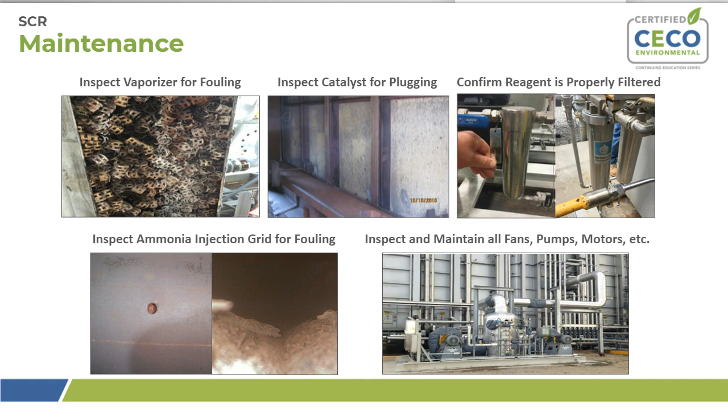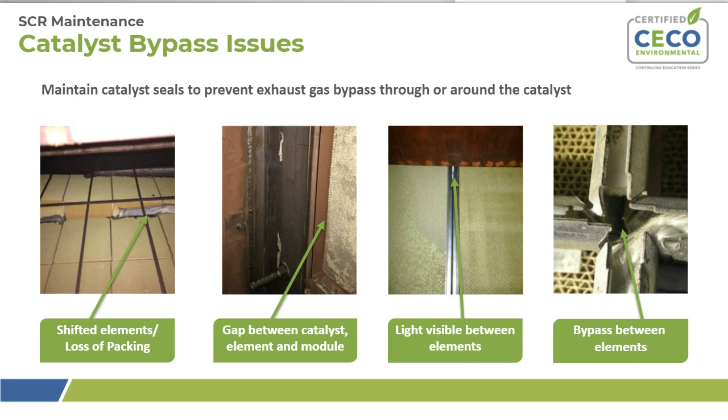And then tuning of the system. All of these types of SCR systems have some sort of tuning method that can be done to make sure the amount of ammonia going into the process is what is required and that it's being evenly distributed and can be measured. So in some cases, there's a test grid included downstream of the catalyst that can actually take measurements of the emissions at specific locations to make sure the ammonia injection grid or ammonia nozzles are performing well and evenly distributing the ammonia across the catalyst face.